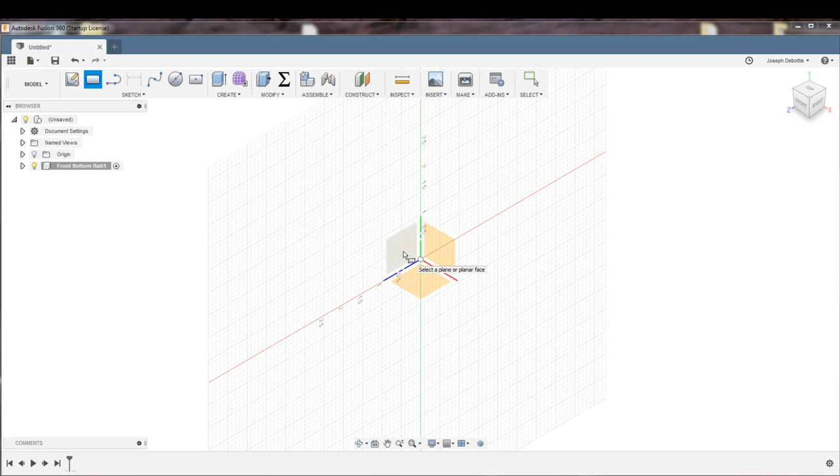Next, we'll click on the two-point rectangle icon and then choose the left plane to begin our sketch. Start at the origin and draw out a 3/4 inch by 14 inch rectangle. Hit the return key twice to lock in the values. Resize the sketch to bring it into full view, then press Q for push-pull.

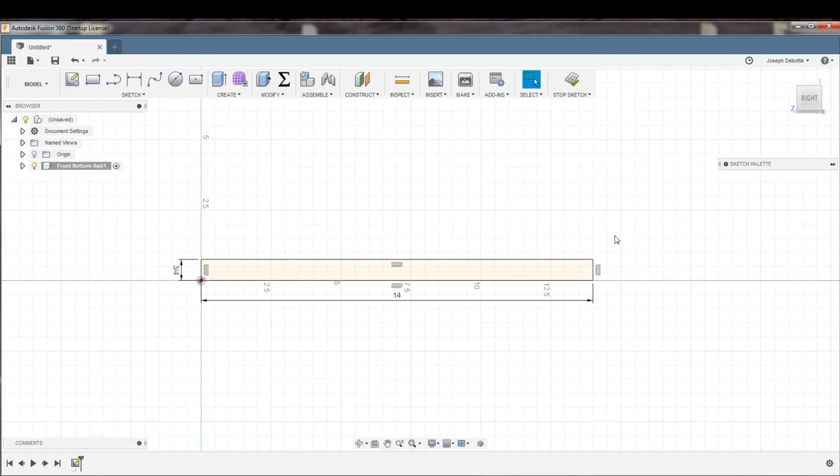Enter 1 1/4 inch in the distance entry, and be sure New Body is selected in the Operation entry. Click on OK to complete the action.

Rotate the model using the View cube so that the front is visible.

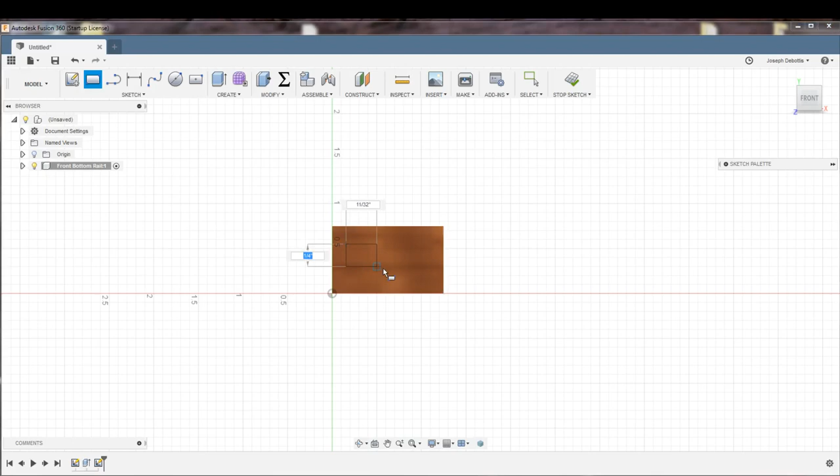Now click on the two-point rectangle icon and then choose the front face of our model. Draw out a 3/4 inch wide by 1/2 inch rectangle and click Enter.

Using the Sketch Dimension tool, move this rectangle 1/8 inch from the bottom edge and 1/4 inch from the right edge of our model.

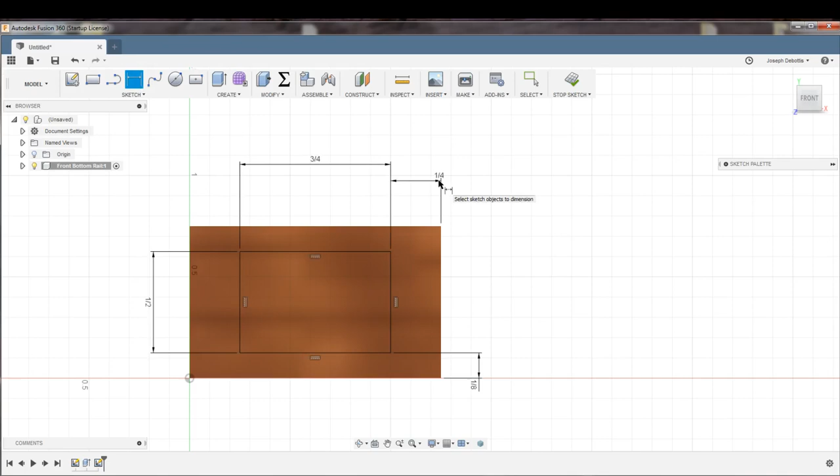Rotate the model slightly to the left and right-click on the portion of the model face outside the rectangle to bring up the menu.

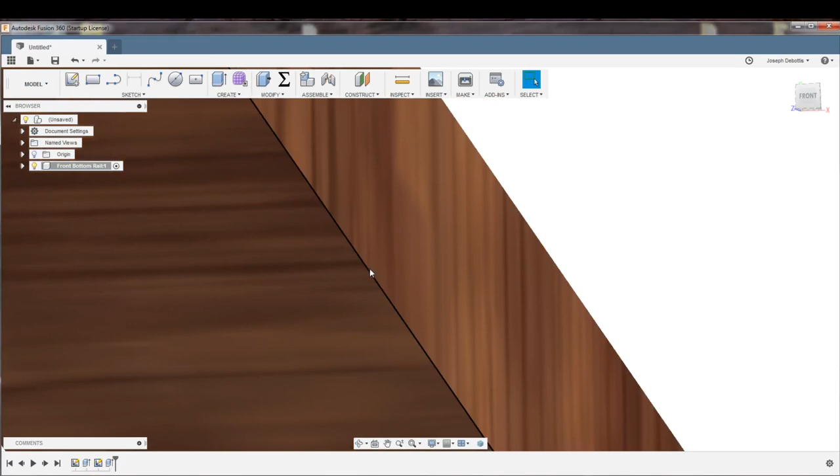Left-click on Push-Pull and enter -1/2 inch in the distance entry. Be sure Cut is in the Operation entry and then hit OK. This creates the 1/2 inch deep tenon on the left side of the model.

Next, click on Construct in the toolbar and select Midplane.

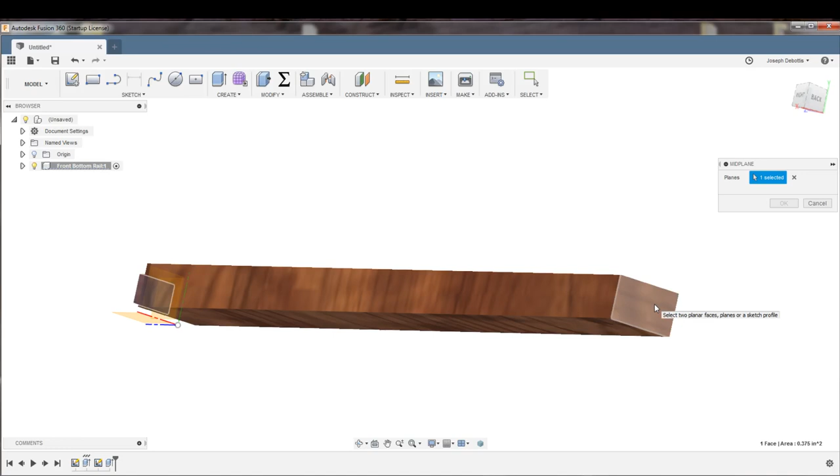Rotate the model and left-click on the tenon face to select it, then rotate the model around to select the opposite face. Be sure two planes are selected in the Planes entry, then hit OK.

Rotate the model once again so that the drawn tenon and midplane are in view.

Left-click on Create in the Tool menu and select Mirror. Be sure Features is selected in the Pattern Type entry, then left-click on the Extrude in the Timeline to select it.

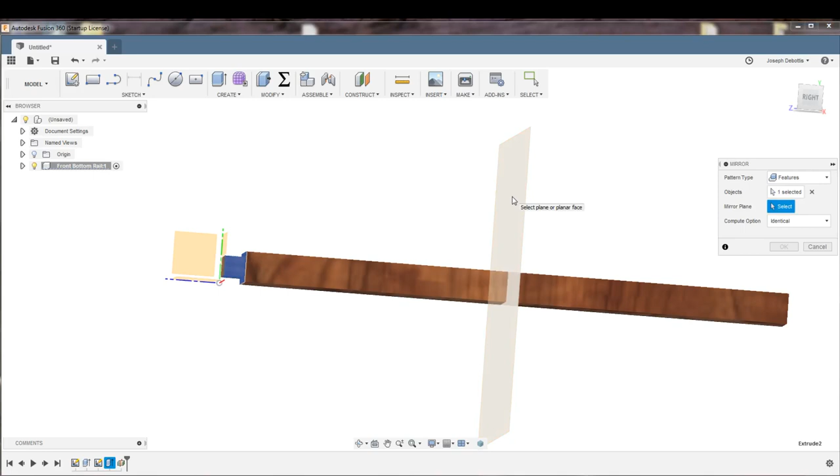Click on the Mirror Plane entry and then select the midplane. Be sure Identical is in the Compute entry option, then hit OK to complete the mirror action.

Turn off the sketches and the construction under the front-bottom rail component. Rotate and orbit the model to be sure the model has duplicate tenons on both ends.

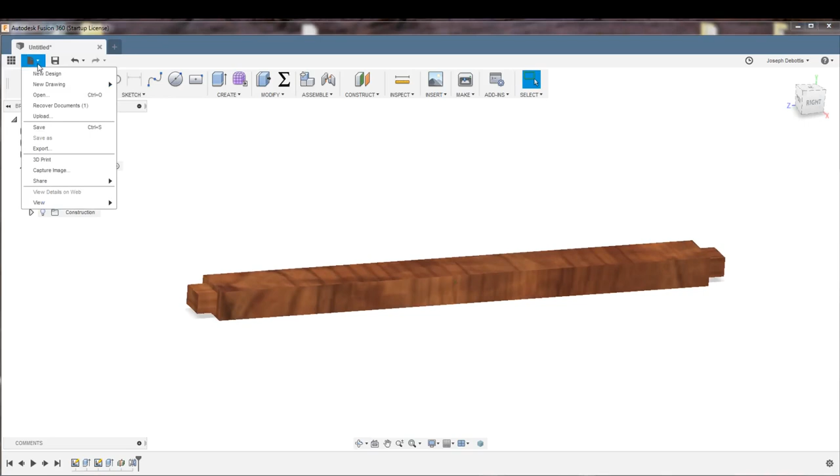And save this model to the Shaker Tables folder, naming it front-bottom rail.

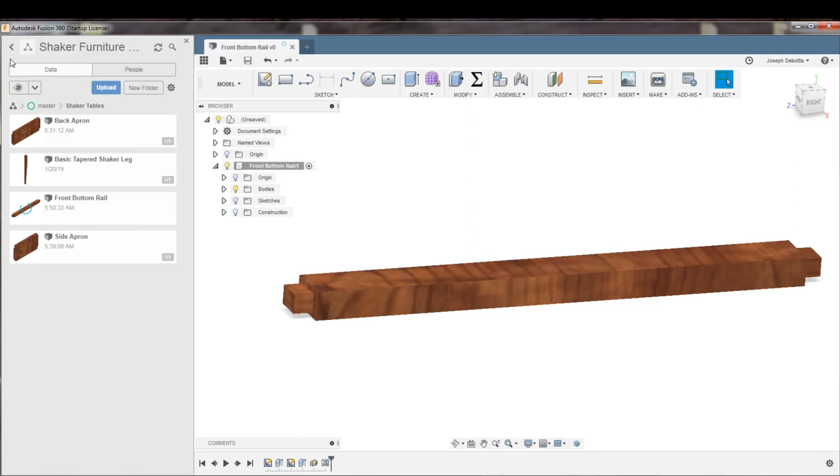Next time, we'll model the front top rail for our classic shaker tables.